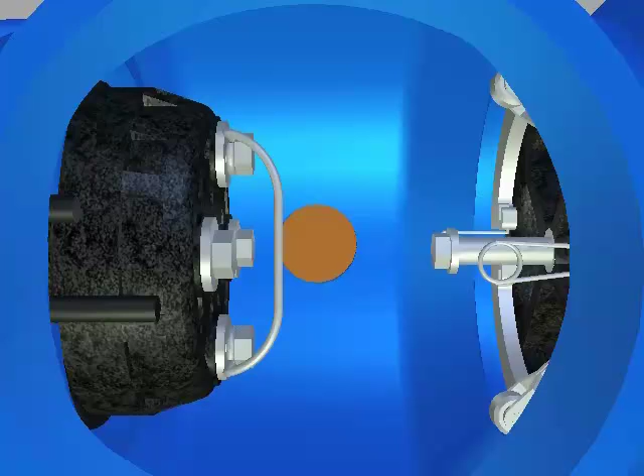To remove the number 1 check valve, locate the 2 tabs of the plastic retainer at the top of the number 1 check. You will want to grasp one of the 2 tabs and push down to remove it from the groove. Then pull straight back and the retainer should spiral out of the groove. Remove the number 1 check assembly.

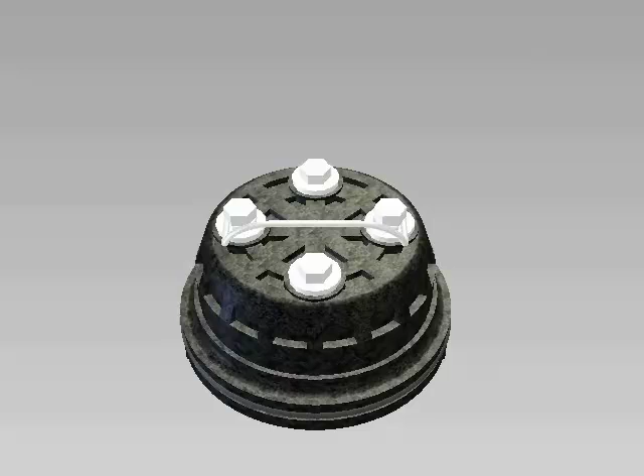Always service the checks one at a time to avoid mixing parts. Both checks can be repaired following the same procedure. You will want to remove the bolts from the seal retainer on the check, then remove the retainer. Remove the seal ring and inspect the face for cuts or embedded debris.

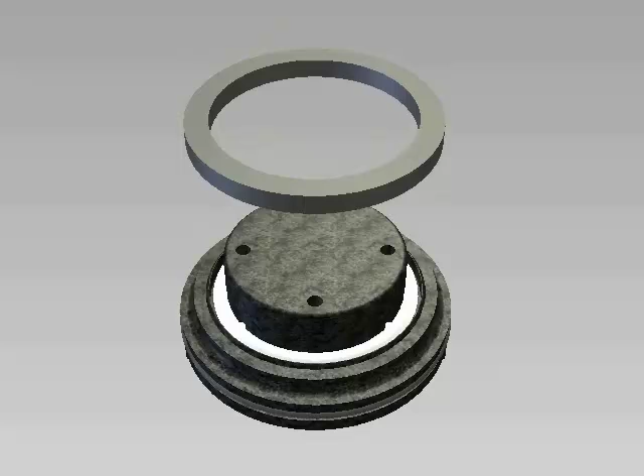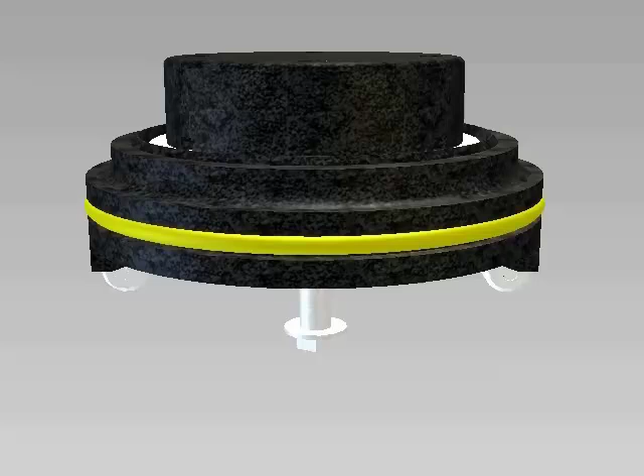For a temporary fix, you can flip the seal ring over to use the smooth side while waiting for new replacement parts. Inspect the sharp edge of the seat with your finger for any damage. Inspect the O-ring around the edge of the seat for debris or damage. Replace any damaged parts. If you are installing a repair kit, replace the seal ring, seat O-ring, and bolt O-rings.

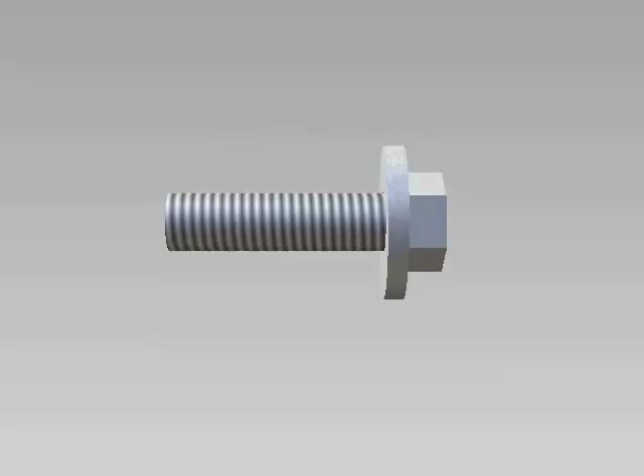Reassemble the check and tighten the retainer bolts evenly. Clean and inspect the O-ring sealing area in the body. Lubricate the seat O-ring.

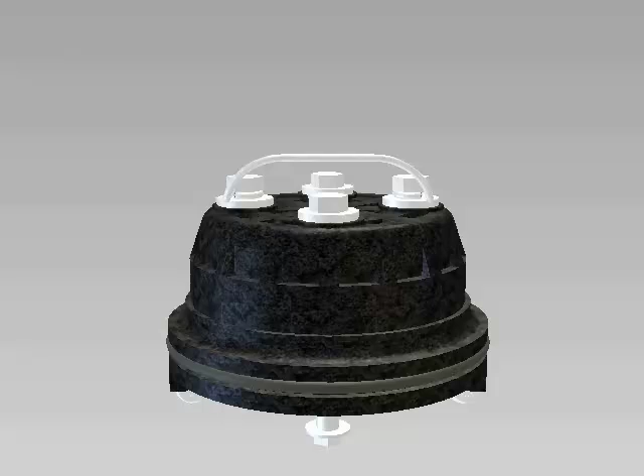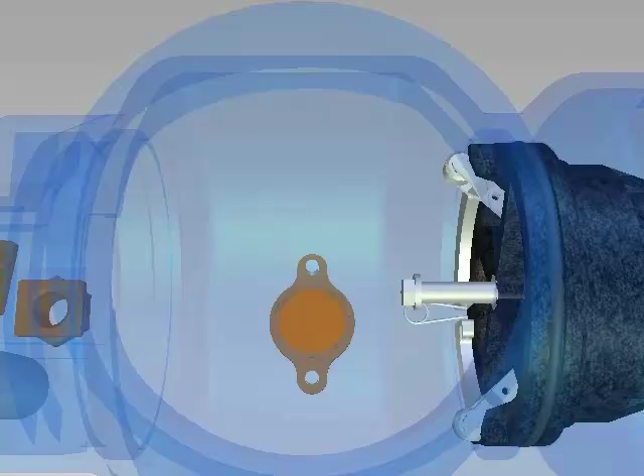To remove the number 2 check valve, locate one of the 2 spring-loaded plate retainers around the face of the check. Pinch the sides of the spring together and rotate the plates out of the body groove, one at a time. Remove the second retainer in the same way. Remove the number 2 check by pulling straight towards the center of the valve.

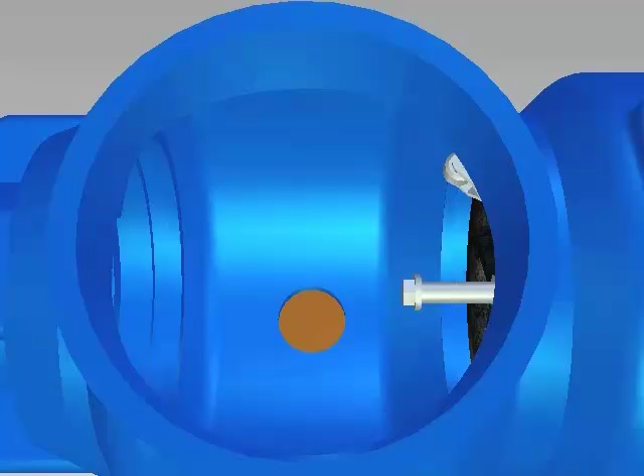After servicing the number 2 check, install it in the body, making sure it is completely seated. The groove for the seat retainer should be completely exposed. If the valve was not drained, water may squirt from the number 4 test cock as the check is installed. Close the number 4 test cock to hold the check in place.

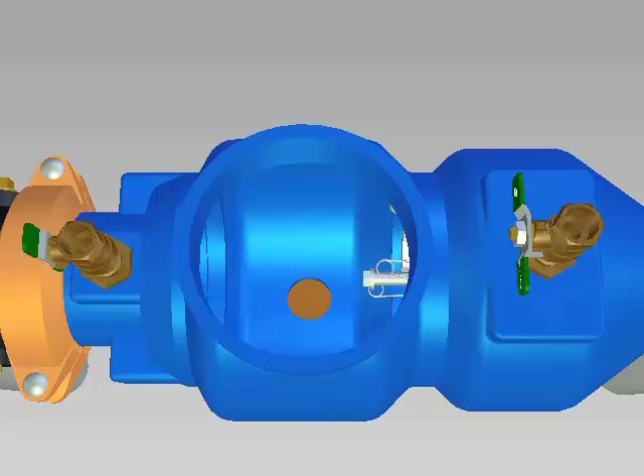Insert the number 2 check retainers by placing one plate into the groove and then compressing the spring to insert the second plate. Insert the second retainer in the same way. Install the number 1 check in the body and close the number 2 test cock to hold the check in place. If the valve was not drained, water may squirt from the number 2 test cock as the check is installed.

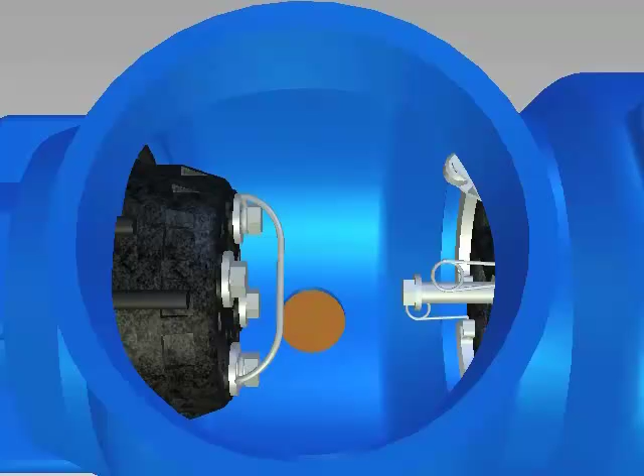Install the plastic retainer by inserting one end into the body groove and then sliding your hand around the face of the retainer, pushing it into the groove as you go. If the bolts on the cover plate on the bottom of the valve were loosened to drain the valve, retighten them now. Be sure the O-ring is still in its groove.

Place the groove coupling gasket over the valve opening. Lubricate the outside of the gasket. Replace the cover and reassemble the groove coupling. Make sure the coupling is seated properly and the ends of the coupling halves touch. Close the number 3 test cock.

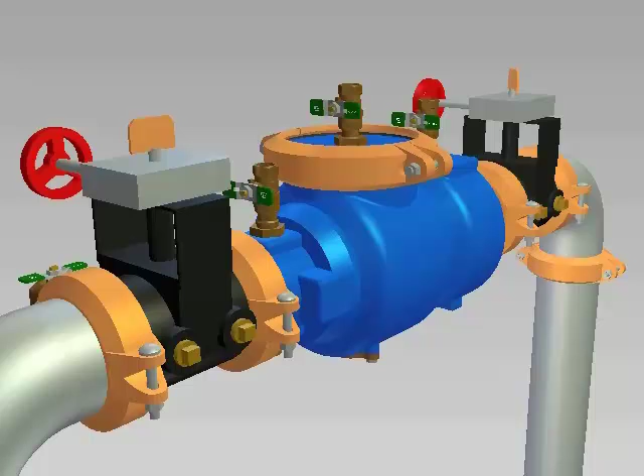Open your inlet valve slowly to pressurize the assembly. Inspect for any leaks. Open and then close test cocks to bleed air from the assembly. Open your outlet valve a small amount and wait for the system to pressurize. Fully open the outlet valve once the system is pressurized. The valve should be tested by trained personnel to confirm that it is working properly.